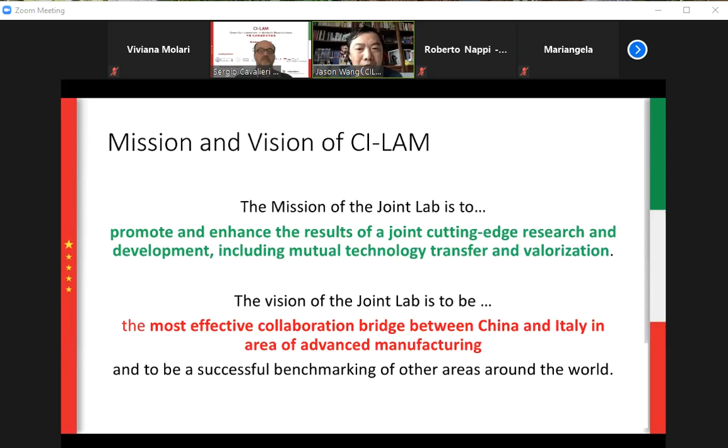Now you can see that CI-LAM's full name is the China-Italy Laboratory of Advanced Manufacturing. The mission of this joint lab is to promote and enhance the results of joint cutting-edge research and development, including mutual technology transfer and valorization. The vision is to be the most effective collaboration bridge between Italy and China in the area of advanced manufacturing.

There are altogether 5 founding members. The first is the University of Bergamo, then the University of Naples Federico II, and Tsinghua University, plus 2 incubator and industrial organizations: one is Campania New Steel, and the other is China Science-Tech Automation Alliance, which I come from. You can also see the logos of these 5 universities and organizations.

In fact, now we have received applications from several other universities, for example China South Science and Technology University, and also several applications from the Italy side. So I can see that in the near future the members of the joint lab will increase to about 10. This is my view. You can also see there is an inclusive model: we have a research area, and also some bodies from the industrial alliance area.

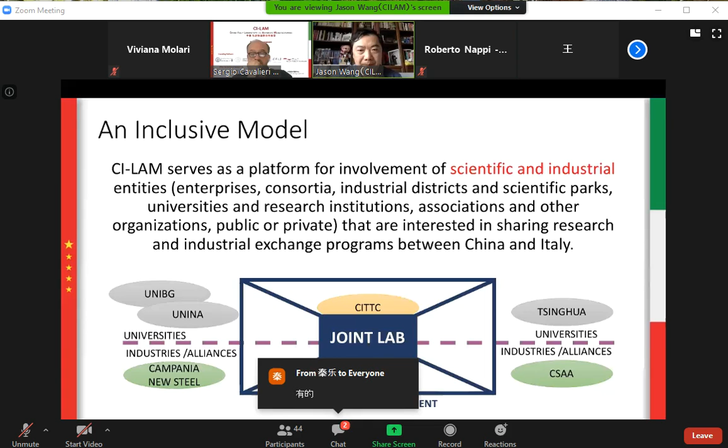The action plan of CI-LAM is to do researches, of course, to do joint research, and to make some programs - training, education, and also exchange and mobility programs.

Now we are running one of these such programs. CI-LAM will also support standardization development and provide strategic services to startups and SMEs, and we will do demonstration and valorization of advanced technologies developed by the joint laboratory. In the future, interaction and cooperation must be the main task of CI-LAM.

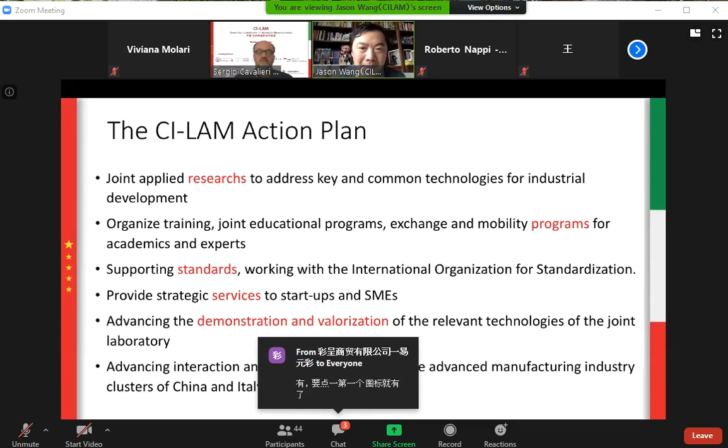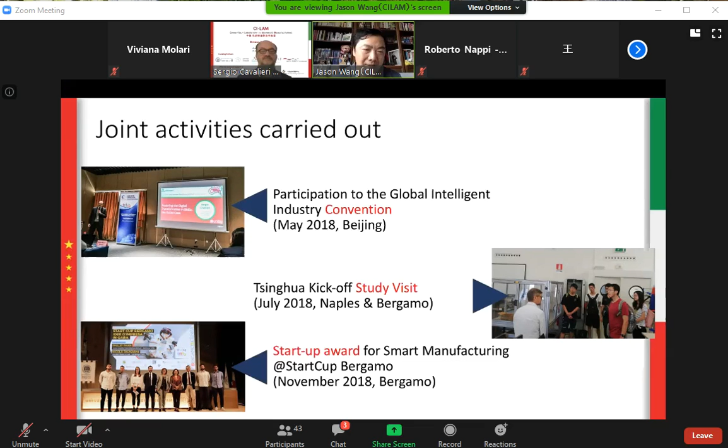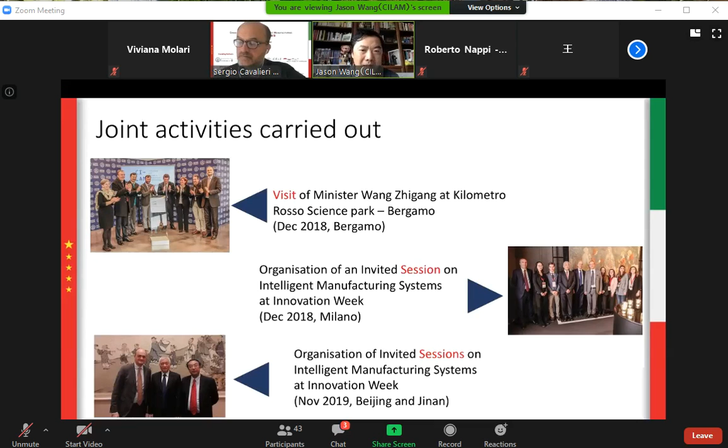You can see several pictures of the joint activities carried out in the past 3 years. CI-LAM was first initiated in 2017, and in the past 3 years we have held several conventions, seminars, a kickoff visit, and exchange and visiting activities. In the upper left you can see the opening ceremony of CI-LAM in Bergamo, two years ago.

Now, coming to this year with CI-LAM Academy - since the virus issue, we have moved all our activities online, and now we are running 2 series of seminars. The overall, comprehensive name is The Power and the Future of TechX.

In our innovation webinars, we are now at part 3, named Power of TechX. The other series, The Future of TechX, is specially designed for graduate and PhD students from both countries. The innovation webinars, for professionals, managers, and researchers, aim at promoting an effective innovation ecosystem exchange between China and Italy on advanced manufacturing. Today we have a short program.

First, after my short introduction, we will welcome a keynote speech from Professor Sergio Cavalieri, who comes from the University of Bergamo. Following the keynote speech, we have 4 startups - 2 from China, 2 from Italy - who will give their own solutions and best practices in this area, on this topic. Finally, if I have time, I would like to have 10 minutes for Q&A. So this is the basic information for today's seminar.

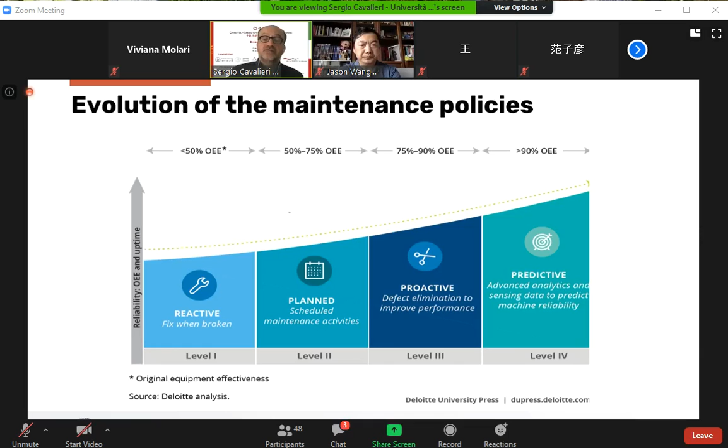And as I told you, most of the solutions which are available are more condition-based monitoring, based on some signals which trigger some conditions about the possible malfunctioning of the asset, while predictive is much more difficult to implement. I mean, try to have an understanding of the possible residual life. So some suggestions from my side.

So predictive maintenance is very fashionable, is very intriguing. I mean, trying to understand the residual life, but as I'm writing here, not all that glitters is gold. So we must be very aware and very careful when we apply predictive maintenance in the companies, in the daily life, because there are some pros and cons. Okay, so we must have an engineering attitude in trying to understand if and when and how predictive maintenance can be applied.

So first of all, there is no off-the-shelf solution we can buy. I mean, we cannot have the idea of buying a software. Let's take a software from the shelf, we implement predictive using this software. I mean, each solution, each condition, each factory, each machine, it's like a human being, has a different way to react to some conditions. So predictive maintenance is not a software, it's a project. So it's different, it's a study. So it's much more difficult to implement than just implementing a software like an office solution in our laptop.

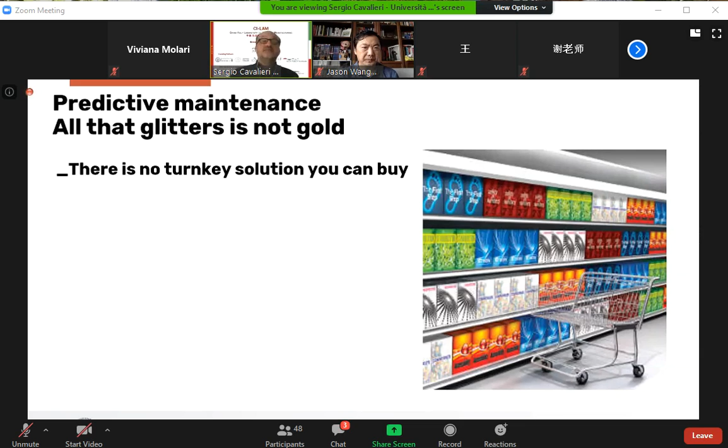The second, pick the right assets. What does it mean? I mean, as I told you before, we have to escape from the imagination that reactive maintenance is bad and predictive is good. Like the example of the light bulbs, it's useless to use predictive maintenance in predicting the residual life of the light bulbs in our house. When they don't work anymore, we change them. So in this case, reactive maintenance is the right solution for fixing the problem. It's useless to have a predictive approach.

While if we are in a nuclear power plant, of course, when we have a specific kind of components which are very critical from the safety, from the environmental point of view, it's important to try to control them and avoid any breakdown, because this could create a very bad escalation in terms of impact from the safety, environmental, and so on. So pick the right assets means, in order to understand if predictive can be applied, we have to understand where it's more functional to be applied.

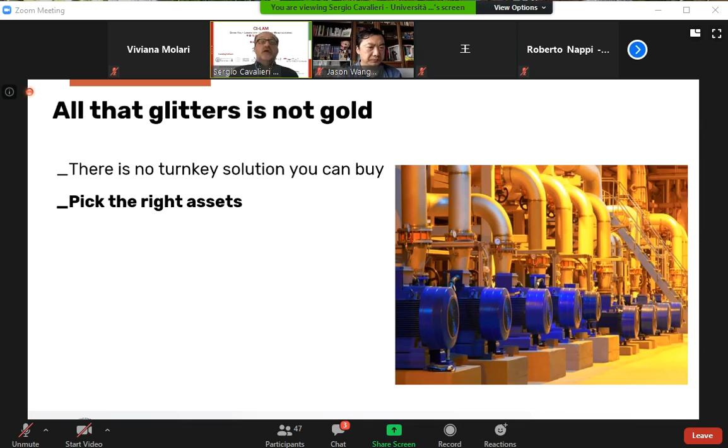The overwhelming goal is to maintain optimally, not to over-maintain. So the other thing is that we have to try to avoid, let me say, an over-maintenance, over-service of our machines. Maintenance, it's a cost. It's an investment, of course, but it's also a cost. So when we want to maintain, we have to take into account not just the technical part, but also the economical part of maintaining. Maintaining means having sensors, having engineers, having operators, so it's a cost.

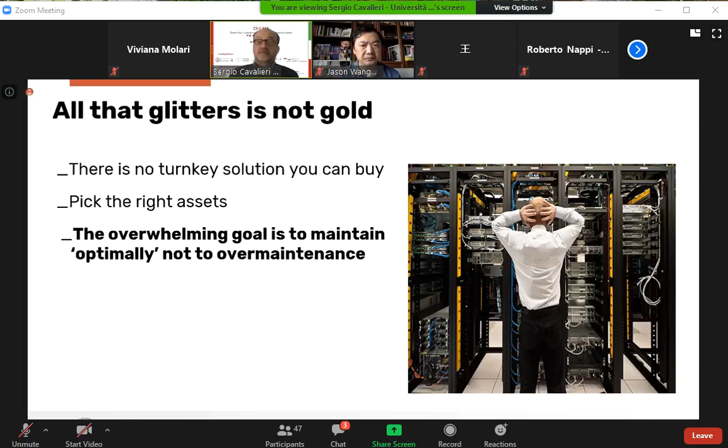So we have to avoid, that's the risk with the predictive. Companies which didn't maintain or didn't have a good maintenance of their assets then shift rapidly to an over-maintenance. So it's very important to understand where and how to maintain in order to take into account the impact on the total cost of the maintenance. When we talk about total cost, we talk about not only the, let me say, operational cost, but the total life cycle cost of an asset.

So maintenance is not just operations, it's not just execution on the asset. We have to adopt an engineering perspective. So when we design a new machine, when we engineer a new machine from the provider's point of view, or when we purchase a new machine from the user point of view, we have to take into account not only the cost, the investment in buying and in selling the machine, the transactional cost, but also the lifelong costs.

...are committed throughout the life cycle of the machine. So it's very important to understand that an equipment is a multi-year exercise, a multi-year perspective. Maybe we can buy a machine which is much more expensive, but with reduced maintenance costs, or vice versa. Maybe we buy something which is much cheaper, but we know that then we have to have a better maintenance of the machine. But this should be made from a more system point of view and a life cycle point of view.

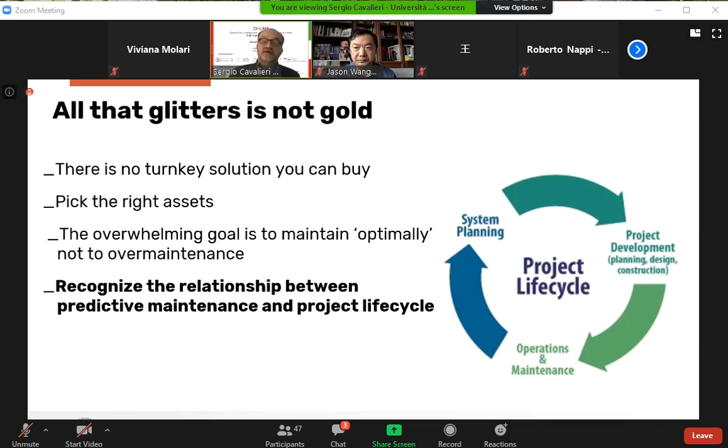Finally, another suggestion from my side. Let's remember that predictive, and this is related to my first statement, is not the software, but requires also brainware. So in a company, we need to have competence. We need to have people that understand what is really predictive. In most of the companies we work with, normally the maintenance personnel is represented by technicians, people who have a very, very good understanding of the technical facts of a machine, but they don't have an engineering perspective. So we need to have engineers.

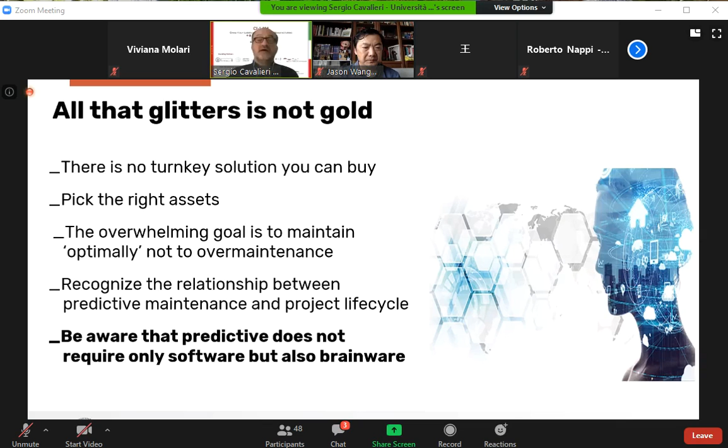So what we are doing in our university, for example, is to train, to educate our mechanical engineering students in order to have this competence on maintenance, on engineering a maintenance system. In most of the companies this is still lacking: having white collars, a kind of maintenance lab within the company, which performs a maintenance engineering activity. So this is what we stand for when we talk about engineering a maintenance system.

So in order to optimize industrial asset management, we have to take into account the whole plant life cycle, which of course should take into account the design phase. That means use of the life cycle cost approach, reliability centered maintenance, failure mode effects and criticality analysis, in order to understand which are the most critical components where to adopt tighter maintenance policies.

But we have also to consider this orientation towards people. So adopting a lean approach, total productive maintenance. So try to make the operators who work on the machine be the first maintenance people, providing first level maintenance activities, having this continuous improvement. So maintenance is not just fixing a problem, but trying to have every day a continuous improvement. And of course, a strong attention towards safety and prevention.

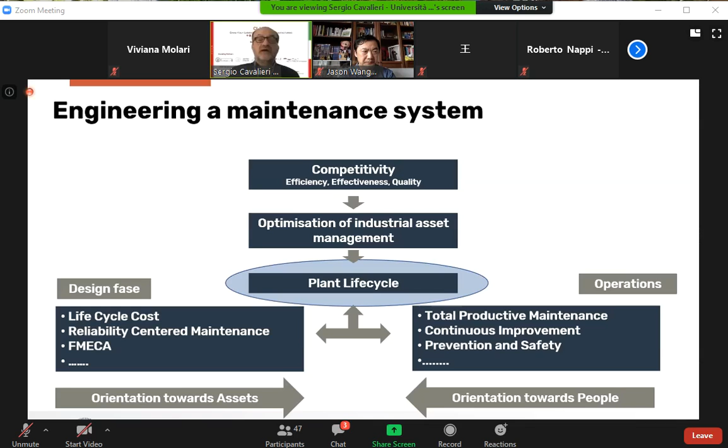So, as I'm telling you, predictive is not just an algorithm. It's not just applying a software, but it's part of a more complex engineering way of conducting a maintenance system. So the main idea is that when we manage individual assets, when we approach some maintenance policies, we have to take into account that this is part of a more complex context, where we have to take into account the role of individual assets within the systems, the asset portfolio management, and the impact on the corporate organization.

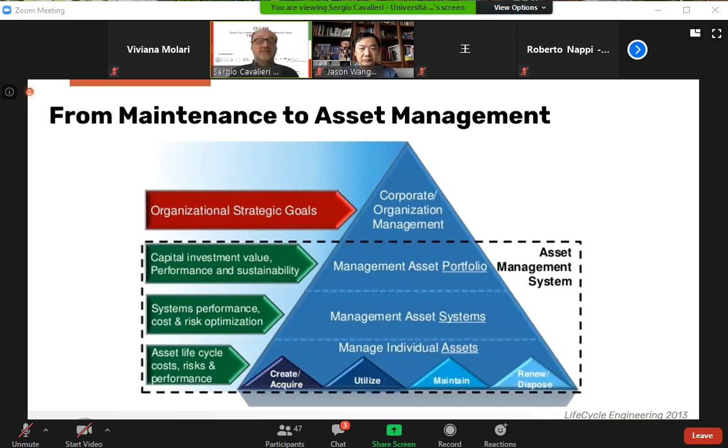But if you consider different decision-making levels from the ISA 95 perspective, we have the physical layer and the sensing layer up to the ERP layer. We have to understand that we have different moments where we can apply maintenance software, because we need to have the sensing activity, the condition monitoring, the fault diagnosis, the prognosis, the scheduling. So it's not just one software to plug in, but requires an understanding of the whole architecture, also from the IT level, in order to perform a good maintenance activity.

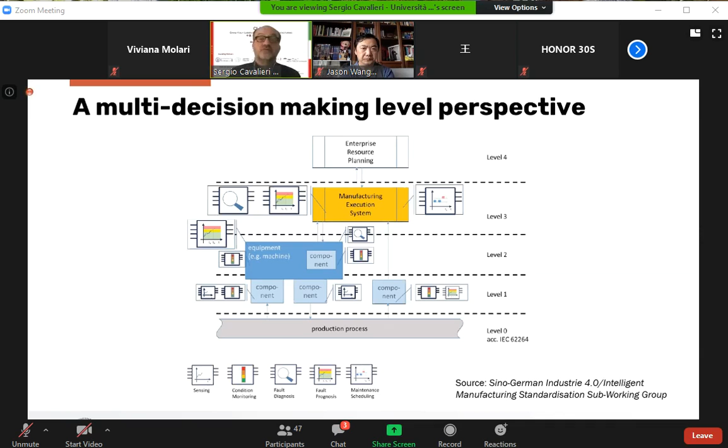This is to consider also how complex it is to implement prognostics or predictive maintenance. We need to have good data. So one important thing is to have very good data. Be careful, big data is not good data.

Maybe we have a lot of data in our data warehouse, but then we need to understand which data are useful. So most of the problem is that we think that we have a lot of data, so we can have a predictive approach. But at the end of the day, we understand that most of this data are dirty, are not good for our purpose. So data acquisition, data cleaning, data manipulation, it's very important and time consuming, because before having good data, we need to have a lot of time of registration, of possible breakdowns, and so on.

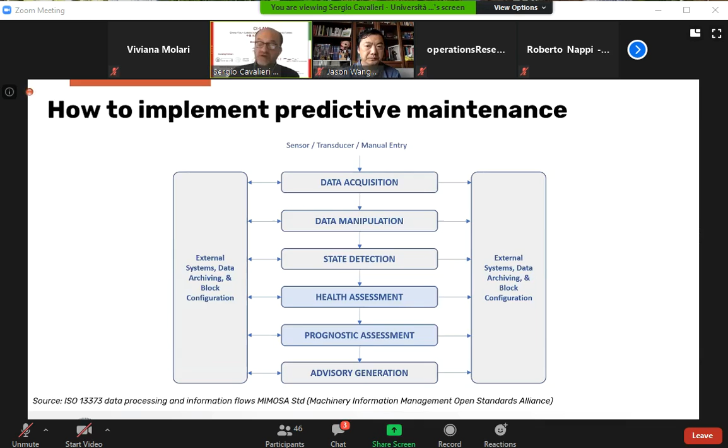Just before quitting my speech, because then I think, Jason, we need to give the floor also to the startups to understand how these opportunities can really be implemented.

I give you two different examples of two projects we performed in our lab on, for example, how to use the electrical signature analysis for having a low cost, let me say, condition-based monitoring. This is not predictive. This is condition-based monitoring. The main idea is that we can use the electrical signature pattern of the line current and voltage of an electrical machine in order to extract information about the health of the electrical machine.

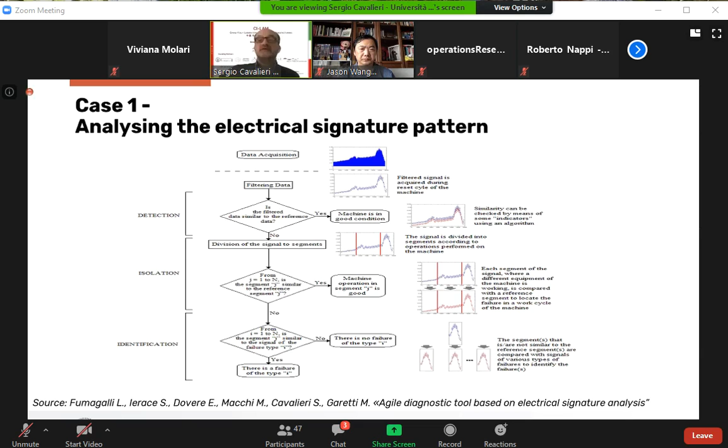So we talk about electrical signature because in normal condition, and this is an example we made in our lab, we can have a specific pattern. It's like our signature. Okay, so this is a signature in the normal condition. This is the absorption of the electrical intensity, and this is an evidence of the normal functioning of that specific device. While, for example, we conducted some experiments.

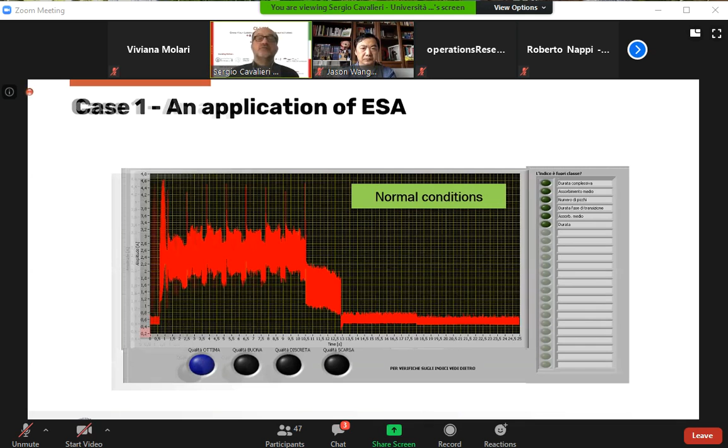For example, we created an obstruction in the pipe, and this resulted in a different electrical signature pattern in comparison with the normal condition. So using the electrical signature is a proxy for a low cost approach, because we don't have to put in sensors which are very costly. It's a very low cost approach to already have an idea, an orientation about the possible malfunctioning, and also understand which parts of the machine are not functioning properly.

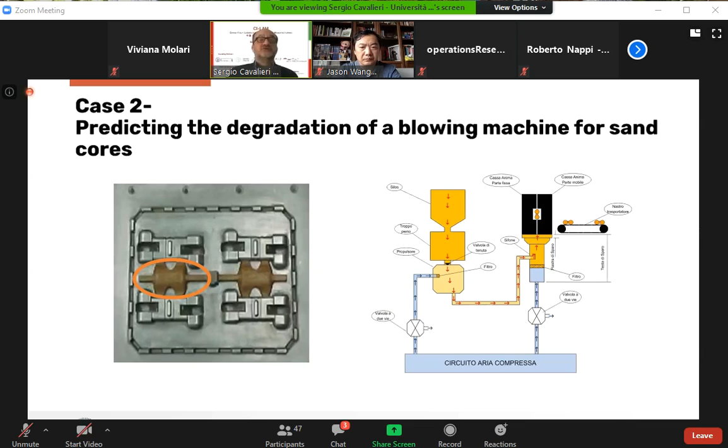Another example, the second one, we performed in a company using brake systems. This is predicting degradation of a blowing machine for sand cores. So understanding, before the occurrence of a quality problem in the creation of the sand cores, the possible malfunctioning. In this case, what we did with the company was sensorizing the machine with specific sensors on pressure, temperature, humidity, and so on.

Then we performed a comparison between a regression model and the application of artificial neural networks. Artificial neural networks are a black box approach in order to have an understanding representation of a specific pattern or estimation of possible malfunctioning. So in this case, we made this comparison between the regression model and the artificial neural networks. Artificial neural networks, since they are black box, don't require an analytical form, so they are more usable when we don't have the possibility to create a real analytical form of the relation between the input and output variables.

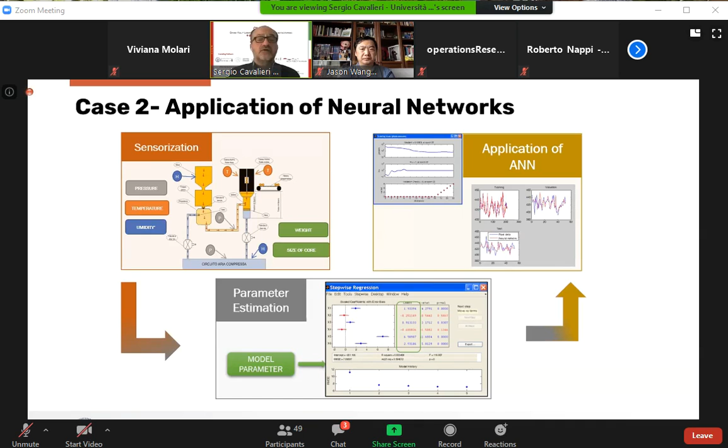Finally, this is a slide I got from colleagues from Politecnico Milano. We have a collaboration between our groups on what we call maintenance digital twin. Jason was also talking about the digital twin, and we had the first webinar about digital twin in smart grid. So also in maintenance, we can talk about the digital twin. That means having the digital counterpart of the physical components.

In this case, in order to have this kind of maintenance avatar, let me say, we need to, as I told you, have the right software components for each of the phases. So once again, we have data acquisition, data manipulation, state detection, health assessment, prognostics, and finally, what we call advisory generation.

So the main idea is that the operator has a kind of dashboard, like the dashboard we have in our car, and they can have an understanding of the possible malfunctioning, alarms, and the residual useful life of a component. So that's all from my side.

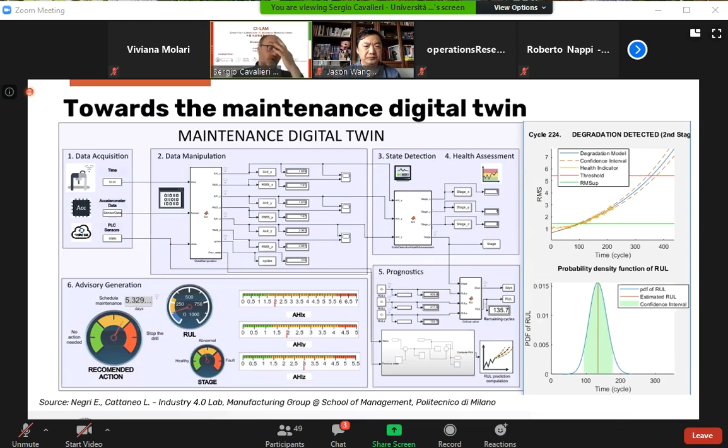And so my recommendation is that since we are in a very critical economic period, don't make the same mistake. Try to keep maintaining, because at the end of the game, if you don't have this continuous maintenance, your cost will be even higher years after.

So maintenance is normally not considered a noble action, because it's considered more a cost than an investment, but more than in the past, you should now consider it a real investment that companies should invest in, not only from the machine point of view, but also training people and keeping the right level of competence at the engineering level.

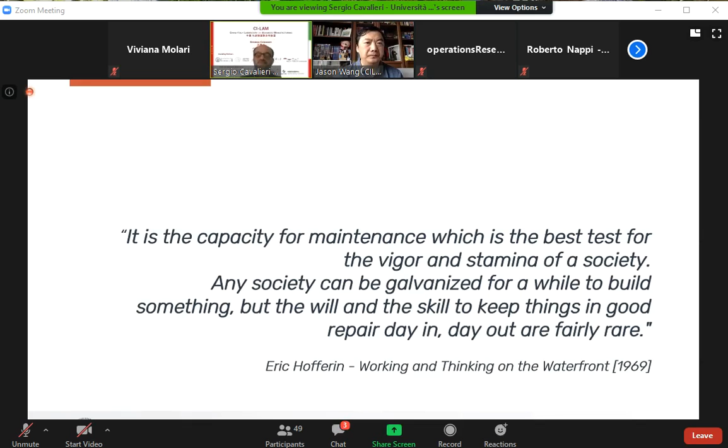Okay, thank you, Professor Cavalieri, for your fantastic presentation. Professor Cavalieri gave a general picture of predictive maintenance, some key points, and also several case studies. We will move to the other steps, and finally at the Q&A stage, we can give the audience some time to interact with Professor Cavalieri.

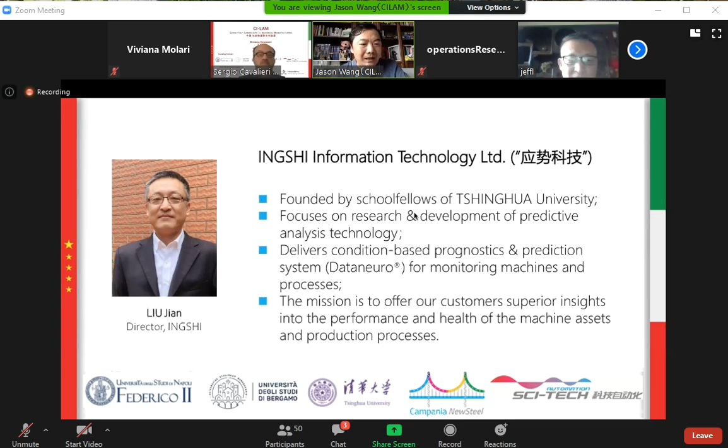Now we come to our next stage. We have 4 different startup companies from China and Italy. The first one, I would like to introduce my alumnus from Tsinghua University, Mr. Liu Jian, whose English name is Jeff Liu. His company is named INGSHI, a very innovative company in this area, and we have some in-depth collaboration on the digitalization and transformation of Chinese industry. Now welcome Jeff Liu to give his speech.

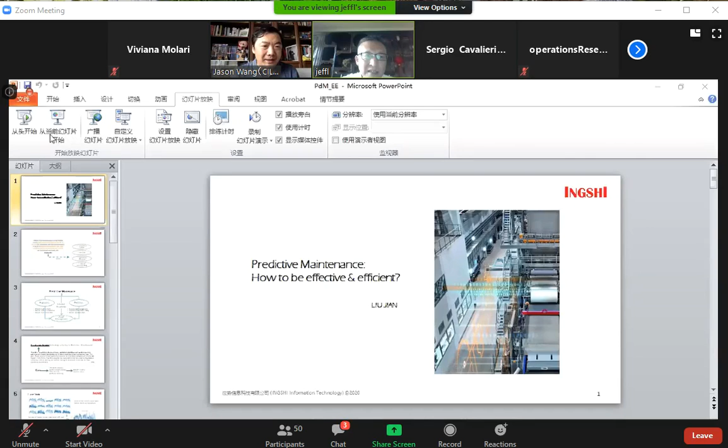Okay, please, Liu. Okay, let me share my screen. Is it okay, Jason? Can you see the screen? No. You can try to share your full desktop. Now you can see, right? Yes, good. Start.

First of all, thank you, Professor Cavalieri, for your very valuable knowledge sharing. Good morning, Italian friends, and good afternoon, Chinese friends. I'm Liu Jian from INGSHI Technology. It's my pleasure to share with you the topic: predictive maintenance, how to be effective and efficient.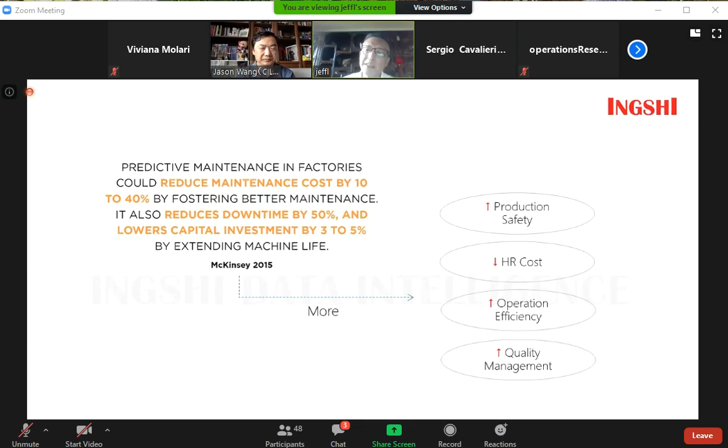To my knowledge, predictive maintenance is applying advanced technology plus industrial knowledge to optimize asset management. The technology applied includes prognostic technology and prediction technology. Prognostic technology is mainly to prevent machine faults and reduce machine downtime, while prediction technology is to improve asset management and reduce overall operation costs.

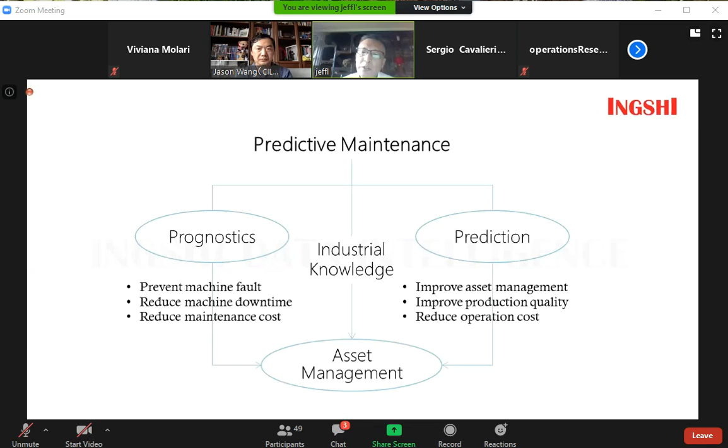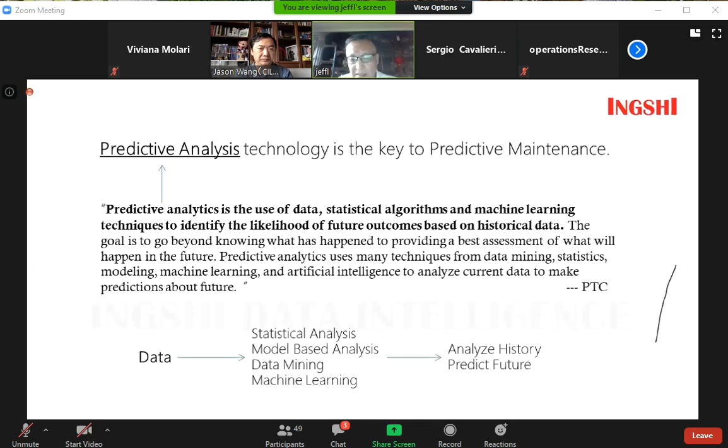So what's behind these technologies? It is what we call predictive analysis. According to PTC, predictive analysis is the use of data, statistical algorithms, and machine learning techniques to identify the likelihood of future outcomes based on historical data. In other terms, predictive analysis uses data to analyze history and predict the future, applying statistical analysis, model-based analysis, data mining, and machine learning.

Now let's move on to the case study. This case study is from one of our customers. It's about a steam turbine machine. The machine broke down without any sensors issuing alarm signals.

So the customer expected us to answer the following questions. First, was there any omen before the machine fault, and how to identify the omens? And what actually happened during the omen period, and what's the condition trend of this machine?

So the customer sent us a data set which contains data 6 weeks before the machine fault. This data includes 56,000 data points, each with 15 sensor values. So like the time series shown on the screen, here are the 15 sensor time series. And we can find that with traditional methods, it's very difficult to answer the questions the customer asks.

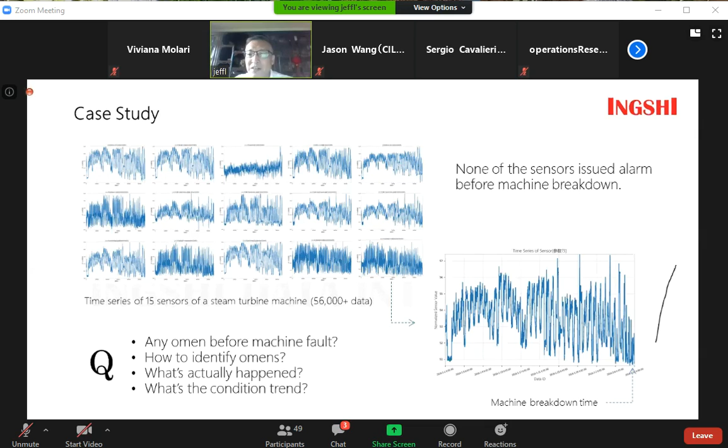So we applied our predictive analysis techniques. First, we do the health assessment based on this set of data. And in this health assessment, we actually combined data fusion, pattern recognition, machine learning, and correlative analysis. We combine these together to make this health assessment.

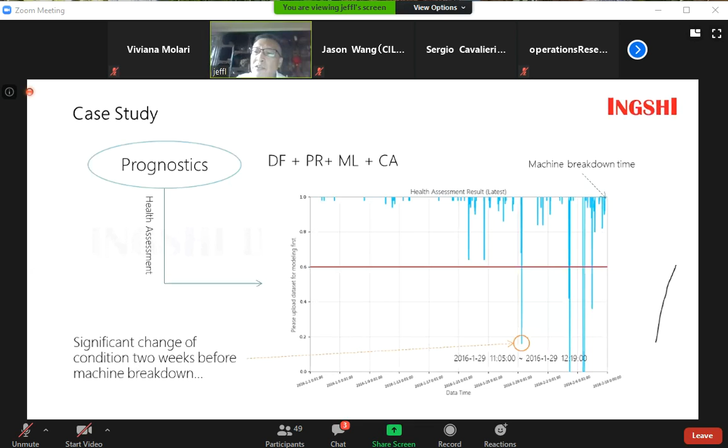And the result shows the customer that about 2 weeks before the machine fault, there is a significant condition change, which means 2 weeks before the machine fault, there are some very obvious omens, even though none of the sensors issued alarm signals.

The second step, based on the abnormal time segments we identified in the health assessment, we did the abnormal analysis for these abnormal time segments. And we showed the customer that during the abnormal time segments, there are several sensors whose values had a significant change.

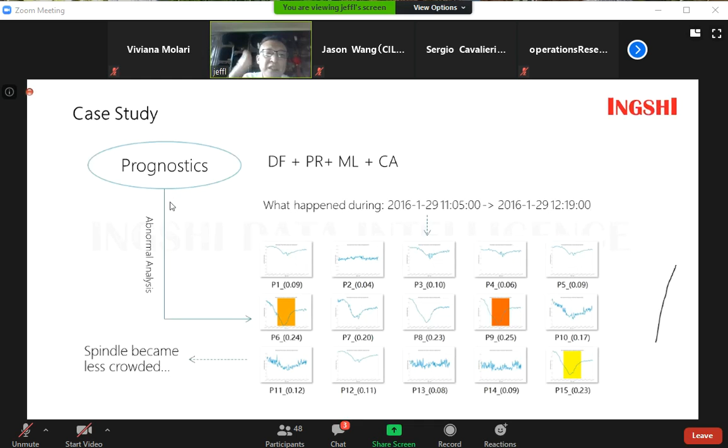And the customer was quite surprised. They said, okay, this sensor value change means that the spindle became less crowded. That is the very obvious omen of the machine fault. So this is what we did in the abnormal analysis.

So the customer said, well, this is very impressive. If we had such information, we could actually start the inspection and maintenance before the fault, and we would be able to avoid the machine fault.

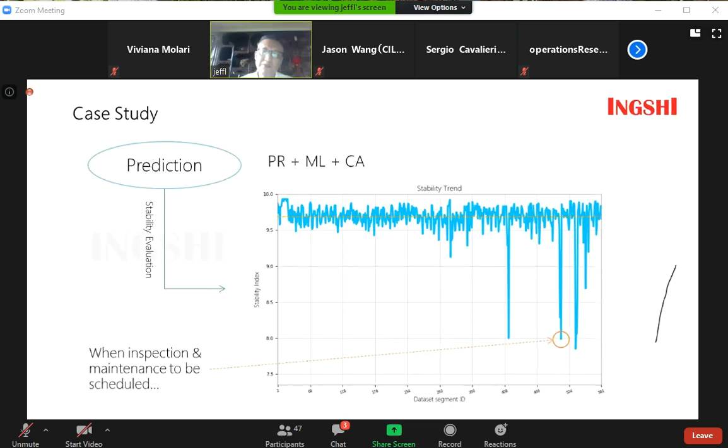So in summary of this case study, based on 56,000 times 15 machine sensor data, we create the condition model for the machine. And we did the health assessment, abnormal analysis, and the stability evaluation for the machine. And together with our customer, we spent less than 5 minutes for the whole process.

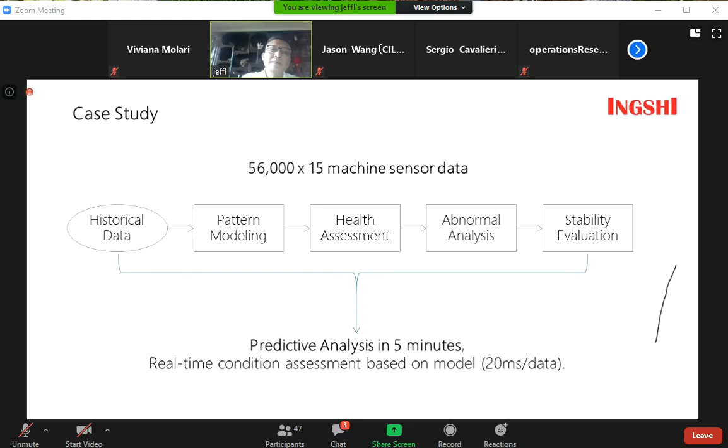So the conclusion is, by applying the advanced predictive analysis technology to predictive maintenance, the customers benefit from effective and quantitative patterning of machine conditions, which means they can monitor the machine condition in a more accurate and easier way. And also we can realize the efficient implementation of predictive maintenance.

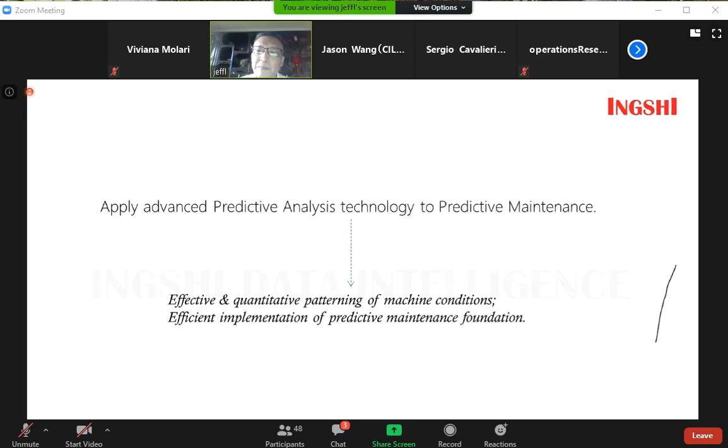I fully agree with the views from Professor Cavalieri that predictive maintenance actually is an engineering system. It's not just an IT system or data system, it's an engineering system. So when we help the customer implement a predictive maintenance system, we offer our predictive analysis technology and combine it with the customers' experience and industrial knowledge, so we can realize a quicker and more effective implementation of the predictive maintenance system.

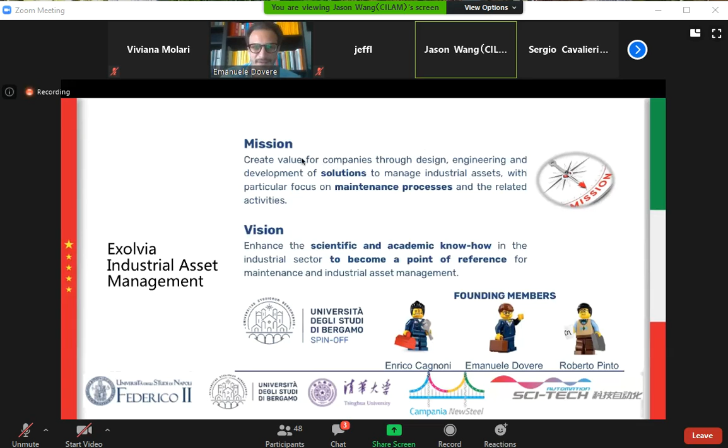Okay, please give your presentation. Thank you, Professor. Yeah, I will quit my presentation. Okay, please. Here. Okay.

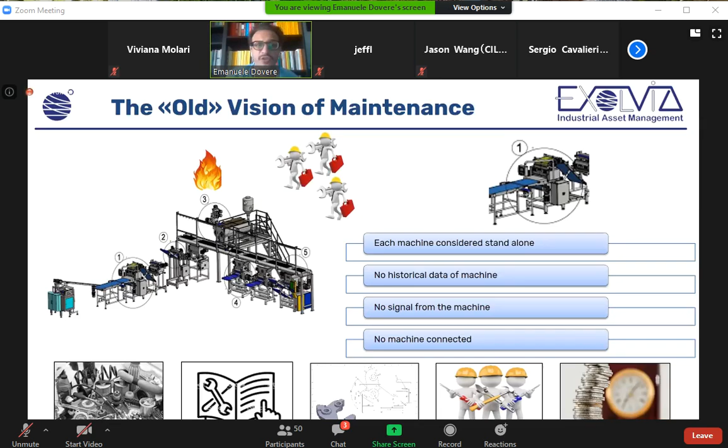Moreover, all the information about materials, spare parts, instruction manuals, technical drawings, the skill of the technicians, and the availability of budget are not integrated. Each time you need this information, this document, this data, you have to find them, and this increases the downtime of the machine. So it's time to jump into a new era of maintenance management.

As Exolvia, we provide two different kinds of solutions. The first one is a software. We have two releases: one is called ezCMMS and the other ezSERVICE. This software allows us to manage the whole maintenance process.

The software is delivered in software-as-a-service modality, is all in cloud, and is active on Heroku, a platform developed by Salesforce. With our software, all the data from the sensors are collected.

You can manage all the documents and all the data in cloud. The documents, the data, the information that you need are available on cloud, and you can access them by mobile instruments or PC, but the important thing is by mobile instruments like a smartphone or tablet.

The second activity that we provide for our customers is to develop maintenance policies with a particular focus on condition-based maintenance and predictive maintenance, using data collected from the machine and indicators collected by ezCMMS. In cloud, we can develop artificial intelligence to manage all this data and to make a sort of digital twin of our assets.

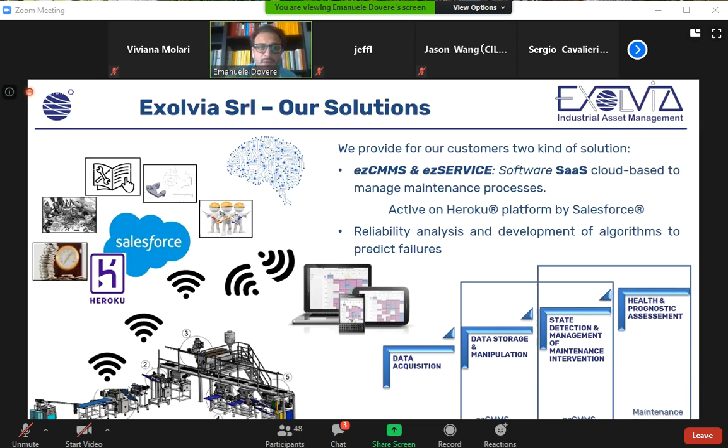As an example, I'll show you one of our projects in a company that manages the integrated water system. In this case, we realized a system for smart metering and leak detection.

We used smart meters in different nodes of the network, and we analyzed different signals like flow rate, pressure, and so on, to evaluate the consumption and the possible leak.

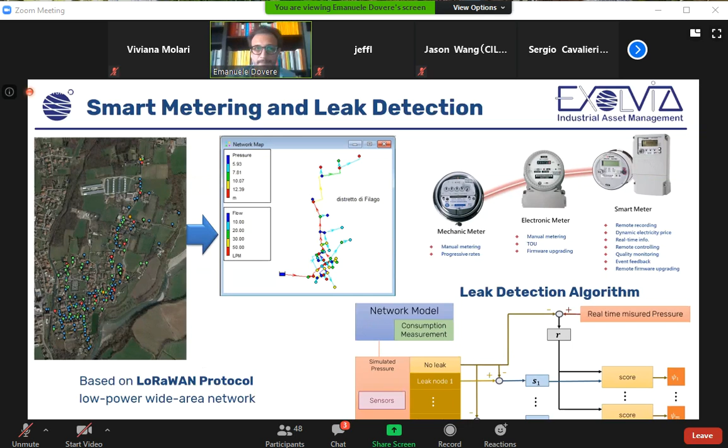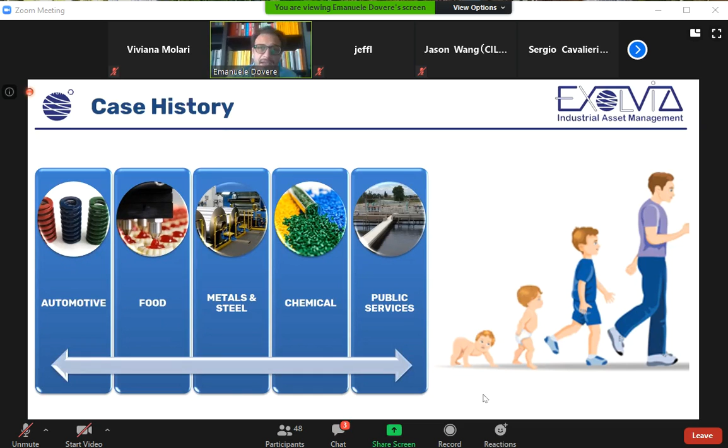In these years, we have done different projects with several companies in different sectors, like automotive, food, metals, chemical, and public services. We were born 3 years ago, and we are growing our collaborations and our expertise year by year.

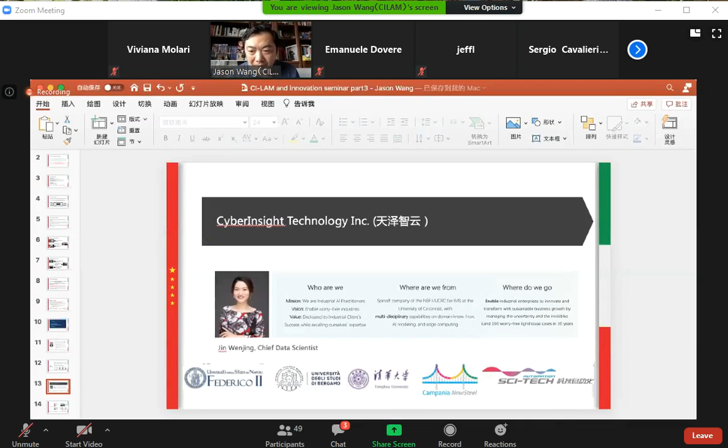Okay, good afternoon, everyone. My name is Wenjing Jin. Thanks to the CI-LAM, and thank you for inviting me. Today I'm going to share a presentation on industrial AI for smart manufacturing applications on the PHM topic.

First, I want to introduce myself. I received my doctoral degree from IUCRC, Center for Intelligent Maintenance Systems, from the University of Cincinnati. My advisor is Professor Jay Lee, and he is the global academic leader in industrial AI and predictive maintenance.

After graduation, I came back to China and started the startup company CyberInsight. I am the chief data scientist. I received the honor of SME 30 Under 30, recognizing the future leaders of manufacturing.

CyberInsight is a spin-off company from the IMS Center. We aim at landing industrial AI applications to achieve worry-free industries. We started a team of talents with multidisciplinary capabilities in domain knowledge, AI modeling, and edge computing. Half of our co-founders are doctors from the IMS Center.

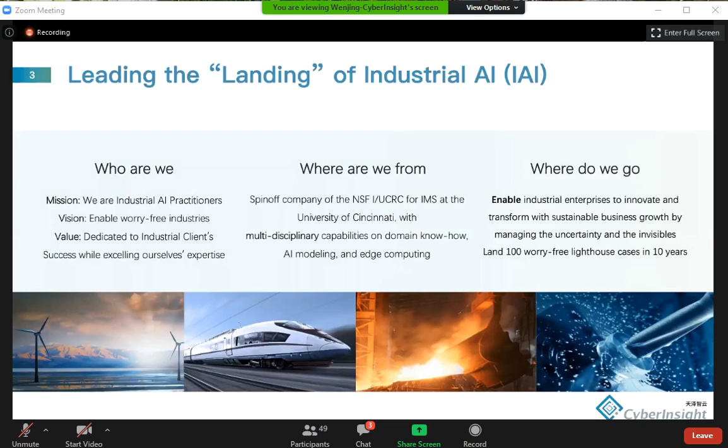The IMS Center was established in 2001. It has conducted more than 100 industrial projects with over 90 members worldwide. Research applications include machining and predictive maintenance for transportation, semiconductor, and so on. The IMS Center has generated more than 800 million.

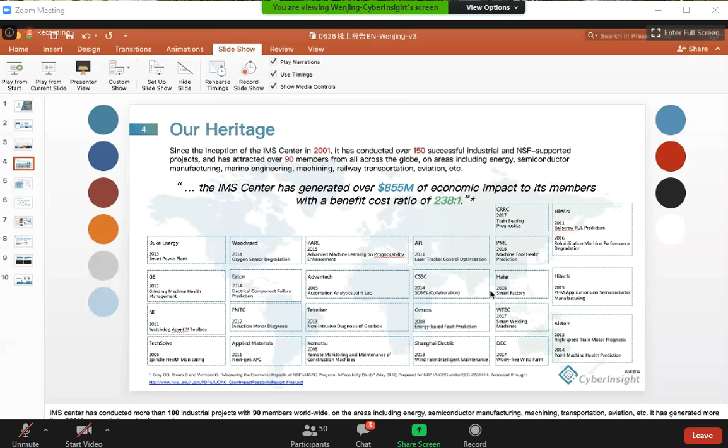So below shows the projects our co-founders used to work with, like GE, Alstom, and Applied Materials, etc.

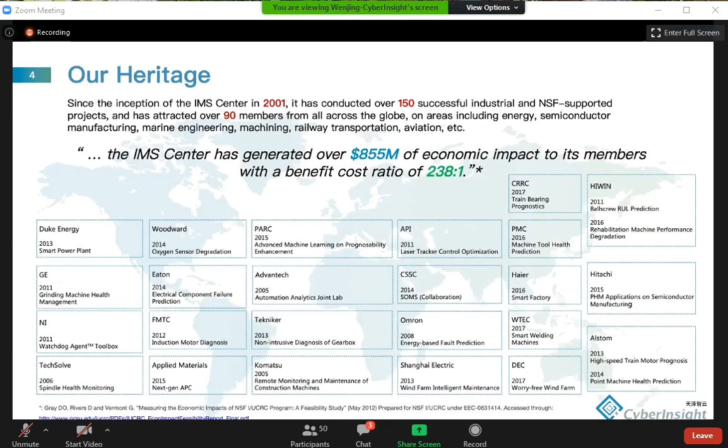So the key of the new maintenance strategy is to solve and avoid the hidden problems in the invisible space. It's like an iceberg—machine failures or product defects are like the top of the iceberg, but degradation has been accumulating, like wear, cracking, or fatigue. It is barely noticed until the failure is formed.

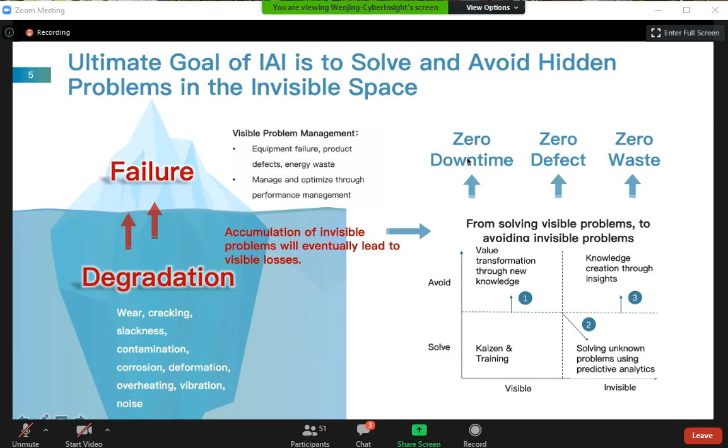That's why we want to monitor degradation. We monitor the signals and convert them to useful information so we can predict the degradation trend and estimate the remaining useful life. So the mission is to enable the product or system to reach near zero breakdown performance. We call it zero downtime, zero defect, and zero waste.

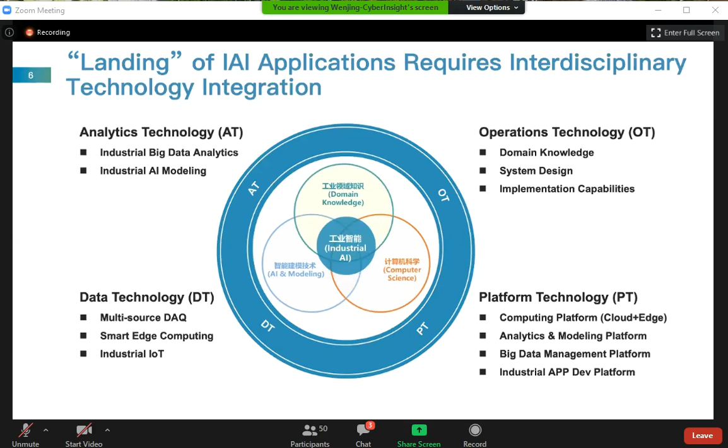The PHM techniques play a key role in industrial AI. It requires four types of techniques, including analytics technology, data technology, platform technology, and operation technology. In the following slides, I will share a couple of case studies in PHM applications.

The first one is from transportation. As far as we know, predictive maintenance is the future of railway maintenance strategy. Alstom is leading in train health management and prognostics. Since 2013, I have been working with the Alstom team to develop research in locomotive motors, rail track, and the point machine.

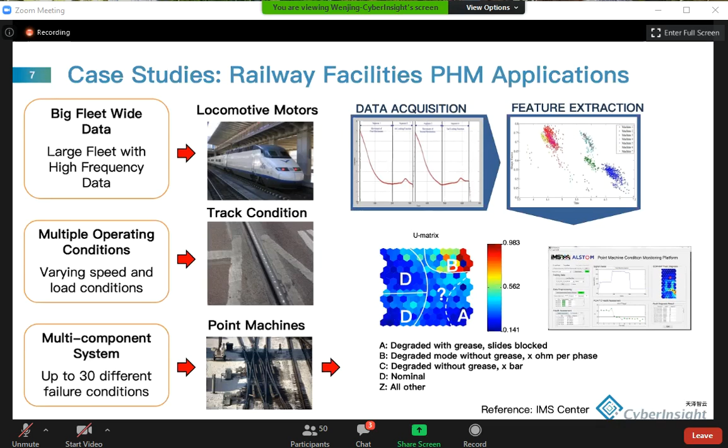For example, we conducted lab tests and field tests on the point machines, acquiring signals from the point machine motors, like motor current, speed, and power. We extracted the features from the raw signal, and later we developed the fault diagnosis model. We can detect 30 types of different failure modes with different degradation levels.

The other case is from the wind turbine. As you know, in the wind farm, the key issue is how to improve power generation efficiency and reduce maintenance cost.

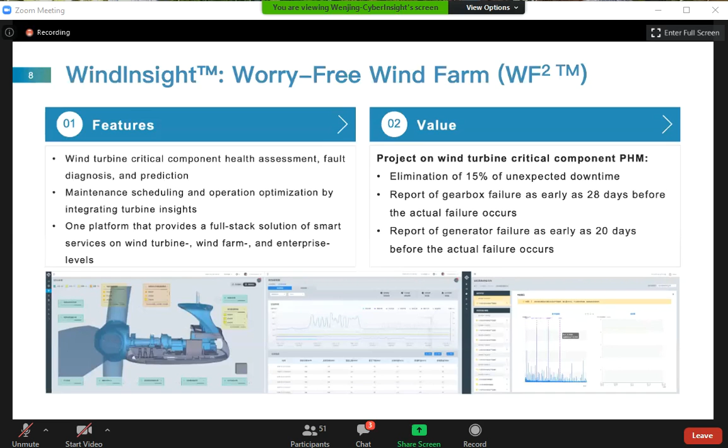The last case is from steel manufacturing. As you know, steel manufacturing is the most energy consuming and costly industry, and unexpected machine breakdown can cause huge damage and impact productivity, resulting in huge loss. Also, thousands of assets are spread across different locations in the factory, requiring a lot of labor work to maintain.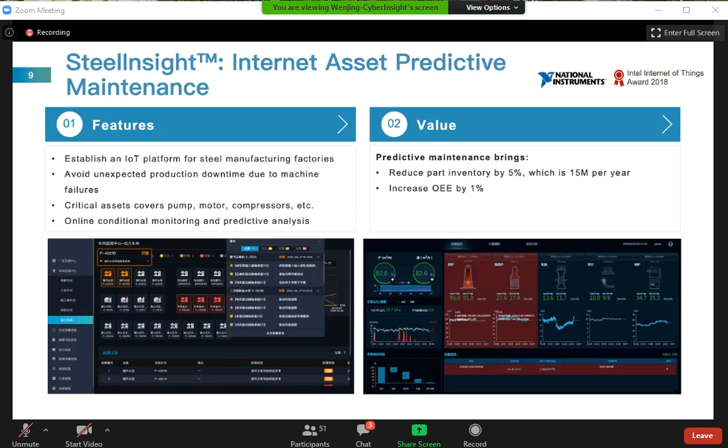That's why we started an internet-based IoT platform for the steel manufacturing factory, so managers and maintenance personnel can easily access the system. A health assessment and diagnosis model was developed for each critical component and asset, so they know the condition of each machine and can schedule maintenance just in time. As a result, it increased OEE by 1% and reduced parts inventory.

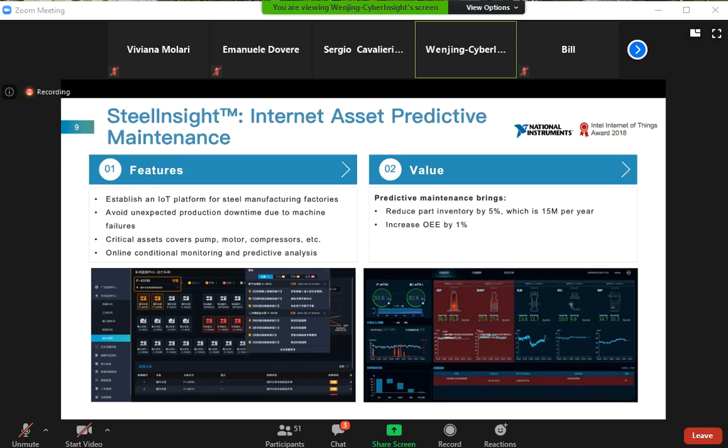That's the end of my presentation. Besides all these case studies, we also have many other successful applications in manufacturing and chemistry, etc., which we can discuss later. Thank you for listening.

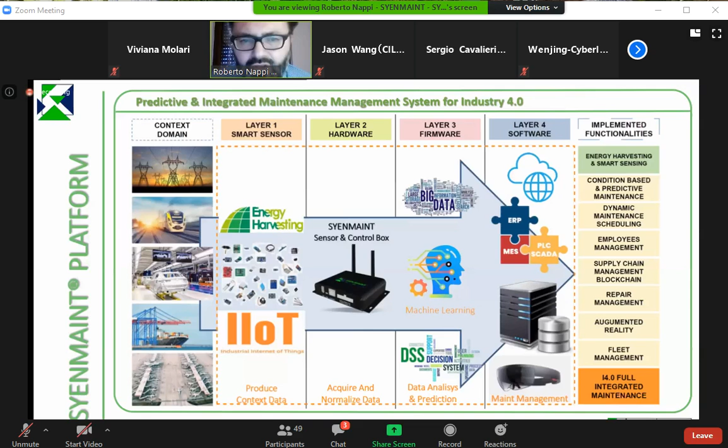We have a medical and healthcare application about solutions to prevent epidemic and pandemic conditions. In the field of the smart building we have developed a structural health monitoring system to predict fault conditions in buildings and also in infrastructures. And we are also involved in several kinds of projects in the industrial sector, and also in energy systems, in production systems of renewable energy communities.

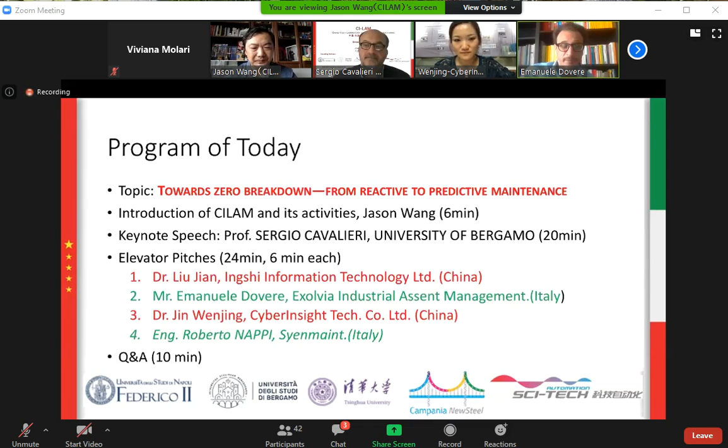Okay, thanks, Jason. How about the final one, please? Yeah, so also for me, I appreciate a lot all of these presentations, and in my opinion, it's a great opportunity to have this kind of presentation, and maybe to have some collaboration with other colleagues. So I hope we can have another situation like this, and we can talk about possible collaboration, because we work at different levels of analysis. So in my opinion, we can have some collaboration, and thank you for the opportunity.

Yeah, for sure. We have several minutes left, and maybe we can take a question from the audience. Yes, may I have a question? Sure, welcome, please. Thank you. My name is Dachuan Shi. I come from Technical University of Berlin in Germany. My research area is also CBM and PM for railway assets. So my question is a general question. Maybe all of you can answer this question.

My question is about the robustness of prediction or diagnosis models. I'm asking because in my experience, the prediction model, especially the machine learning based one, depends significantly on the input data and also the variation of some environmental factors. For instance, when we develop some models for specific application scenarios, and we want to apply these models to similar scenarios but with a different environment, the model may not work.